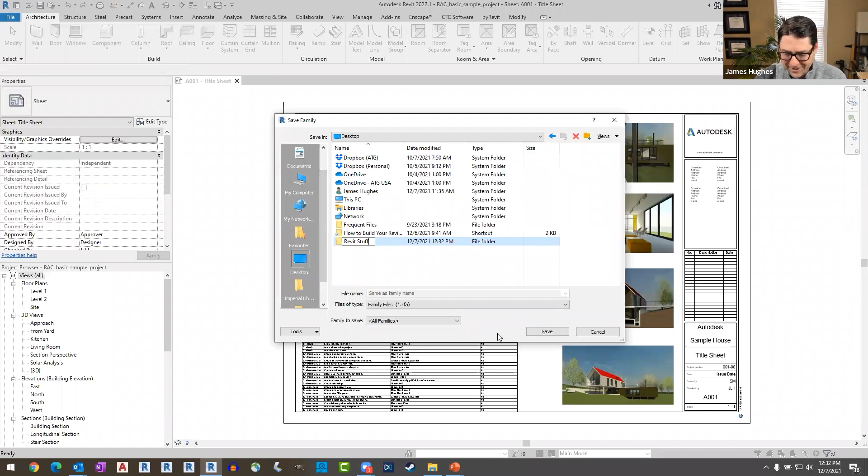We're going to do this, hopefully it won't take too long. We'll create a new folder on the desktop and call it Revit Stuff. Hopefully your naming conventions are better than me hustling through this. By default, it wants to name each of the families it spits out according to the same name they're using inside Revit. I'm going to leave both of these as they are and just hit save.

If you look in the bottom left, I see a progress bar, and Revit is taking about 1.5 to 2 seconds per family, packaging it up and spitting out an .rfa file into that folder. This is a handsome way of doing it, because it's not just asking an exhausted PM at the end of their shift, 'alright, which families did you come up with that we need to add to the library?'

Oh gosh, maybe the elevator and two others—no, this is spitting out probably like 100 families right now. So instead of me harvesting four families I happen to think of off the top of my head, it's going to grab a lot of stuff. Now there's probably going to be two-thirds redundancy with existing families we already have, so we need to be able to solve that problem too.

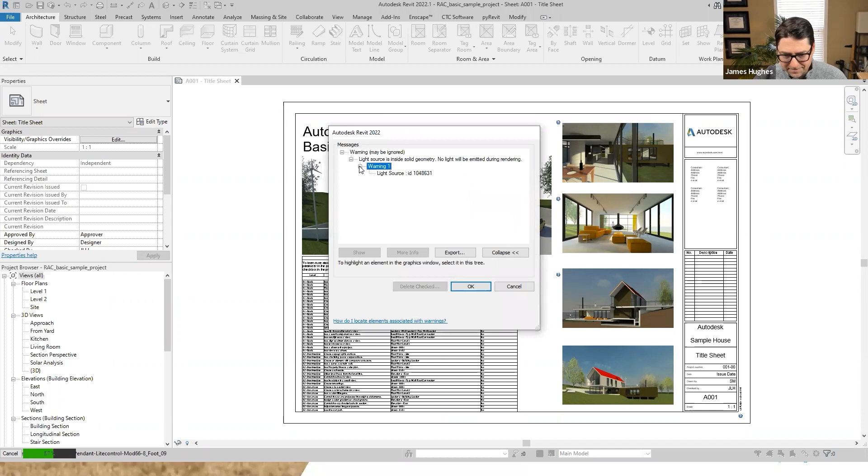There's some other problems to this too, but yeah, this family broke, so that's awesome. All right, we got a light source problem. I might write that number down if I wanted to find that file or family here in the project. I don't care because I'm just making a point. I'm going to hit OK and let it keep chucking along.

So this is going to save out every file. I'm not going to sit and watch that—I'll let it keep churning while I continue to make great points here. So that's the manual way to do it.

One of the shortcomings of this way is it's going to put every family in the same folder and make no distinction about what kind of family it is or how it's different from other ones. It's a little untidy, but man, it got everything. So it's hard to be mad at that process, right? And it's free, so it's hard to be mad at that too.

Here's another way to do it. CTC Family Exporter is a tool that you could get—actually, I think this one's free. What it lets you do is the same thing, pushing every family out, but it gives you a couple of other tools. I think the most important one is it's able to look at the category of the Revit family and make a subfolder with that category name.

And that's awesome. Just putting all the lights in a lights folder, worth it. It also gives you a chance to manually rename things as you go along. So if you're a little bit OCD and you want to make sure that naming convention is applied before it even jumps into a folder, you can do that.

It's also got a great thing where it can apply prefixes or suffixes to the name. So you might put QC as a prefix in front of all the families that nobody's looked at yet. You're basically saying, hey, quality control person, look this over. And when it matches the standards, when you fixed it up or you approve of it, remove the QC from the name. So CTC Family Exporter is going to be a great tool to do this even better, even though the manual way is fairly automated.

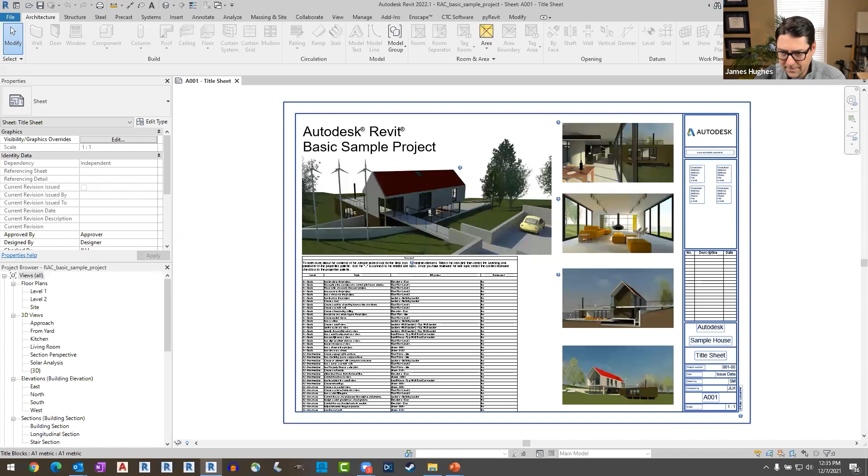Let me check and see where we are on that export. Hey, it's done. All right, let me take a look. Of course, it's underneath this.

All right, hang on, I got to break my presentation here to jump to the folder real quick to make a point. All right, we're on the harvesting slide, we'll come back to it. So we had a Revit stuff folder here.

Check it out, it spit out every family. It got 82 families here. One of the first things I'm going to do is click on the size and sort it so big things are at the top. If you're a BIM manager, this is amazing right here.

So what this lets me do - Autodesk says you have a problem if your family is over 500K. It's too big. Now it'll still run, but if you've ever had projects that chug, that problem right there is probably one of the main components. So what I like to do is look and see which ones Autodesk says are an issue. There's a lot that are just over the 500K line, but there's some gross offenders here.

So we might just look at these gross offenders, open each one of them, put them in sort of this problem child subfolder, and see how we can purge them, remove all the extra materials that maybe a manufacturer baked in. A lot of times I'll throw interior design companies under the bus - if you get something from Haworth, they've got every SKU of that chair, and they've got geometry, just millions of edges that are all baked into one family, and you don't need them all. You just want one configuration of that. So you got to kind of carefully erase and purge some things out of these really large files like this.

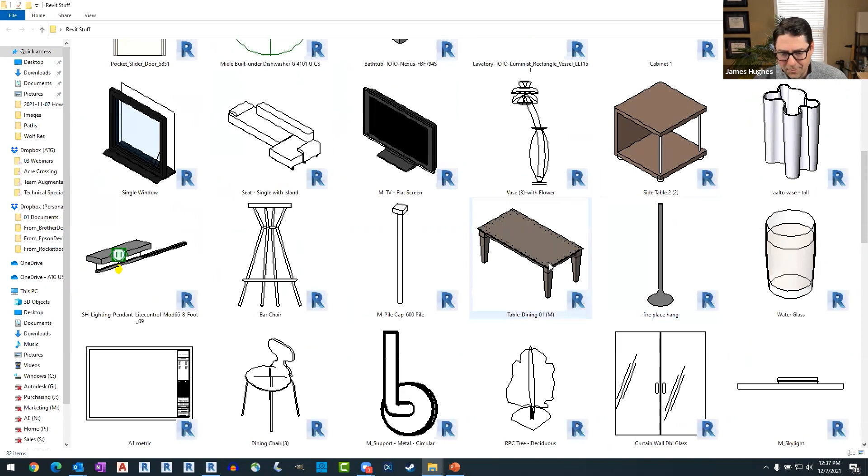All right, one other thing I like to do when it's in this folder is go to view, extra large icons. And now, even though all this stuff is thrown into one folder, this is going to help me to see, oh yeah, that was a great family, or this is junk, I didn't need that. And to choose how you might want to sort these things out or leave them behind and delete them.

You can normally tell at a glance, particularly if you're the PM and you're acquainted with this family. This will help you make some value judgments if you need to add a little bit more QA process before someone gets in and grades them and evaluates them and eventually hosts them. So hopefully that was helpful to show you guys how to manually spit that out. That's already included in Revit, you can already do that today.

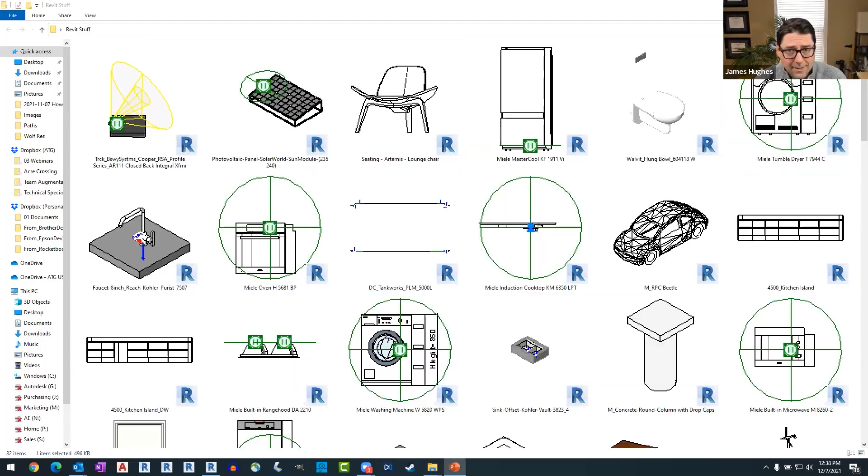All right, let me start my slideshow back up here. Of course it's backwards, you guys can see. Yes, I read. Sue me, it keeps me from going off on tangents.

All right, let me fast forward back to the harvester. Oop, too far. Okay, so I've shown you how to do it manually. I've mentioned the CTC family exporter. I've also mentioned how you can have your PM choose the hero families of the project.

This one's pretty minimally invasive. It's basically just reminding your PM, hey, could you save out the families that you guys either created yourself or you went and found and modified to work? But what's neat about this is you can also incentivize this.

So think carrot rather than stick, right? So we've got last two points here. You can have healthy competitions, you can also encourage this with bounties. I'll tell you, being a PM, the best thing I can get is just an attaboy from either my boss or my coworkers - like, people think that I make neat stuff and I help the team. That little bit of praise or thanks, that's really all I need.

But if you want to take it farther, if you've got someone that's contributing a lot of content and you want to reward high contributors, you can offer $25 Amazon gift cards. And at their hourly rate, you're basically saying your break even is you saved us 25 minutes of time - you've saved the whole team 25 minutes of time. So that's worth it for us to pay you this gift card here.